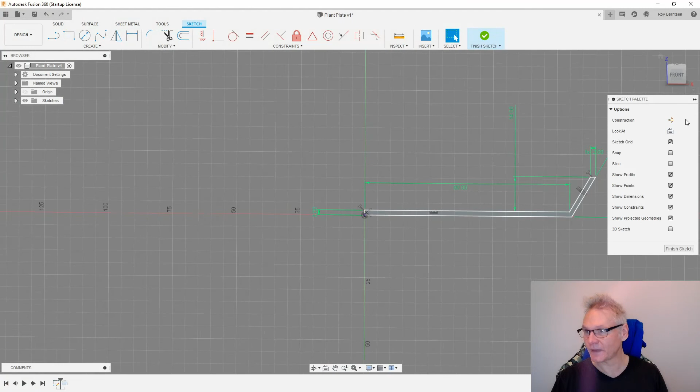I'm Roy and I'm going to show you how I design a new pot for my new houseplant. So I already did the plate which is going to be under the pot, and I'm going to talk about how I designed this. I just make a sketch on the front plane looking like this.

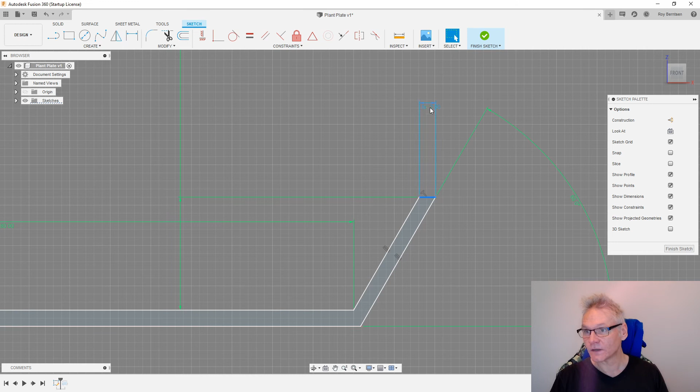I want it to be 2 mm in thickness. What is important to consider is that this line is also adding up in your line count. I have a 0.5 nozzle. I'm going to print with 0.5 mm line width. So I want this number to be able to be divided by 0.5, which means I can have 4 lines going here. And I'm going to show you why this is important.

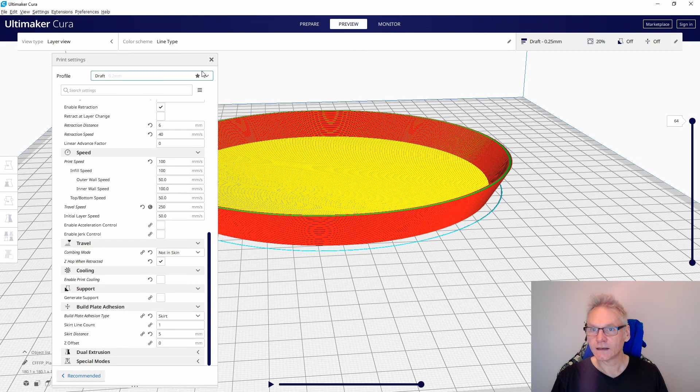I'm just going to revolve this, use revolve in Fusion, pick the profile and do full rotation. Take it into Cura. And now we can see why it is important to have the walls as I talked about. If you now slice it and go to preview, you can have a look at the walls. You can see that the walls fill perfectly with 4 lines. There's no infill, no nothing. You save a lot of time skipping the infill. So this is what we want.

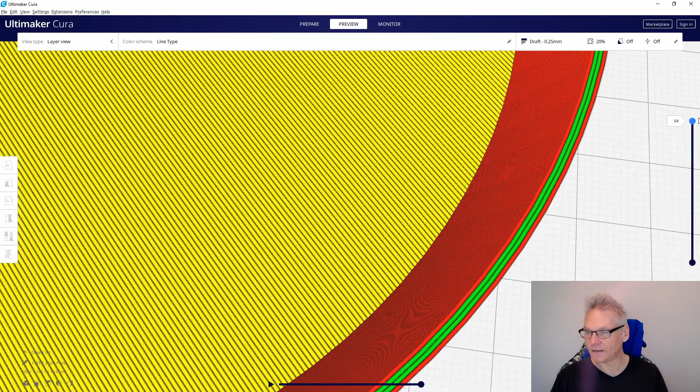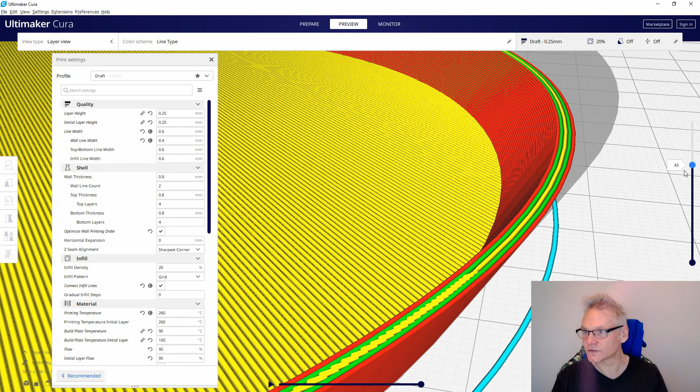Let's say if my nozzle was 0.4 and I was printing 0.4 line width, you will see what I'm talking about. So we're now actually at 2 hours 23 minutes because we need to fill between the wall lines, because our wall lines do not make up for 2 mm thickness. So let me go back to 0.5. Now you can see it's perfect. So this is what we want. And we saved 15 minutes. We're now at 2 hours 7 minutes.

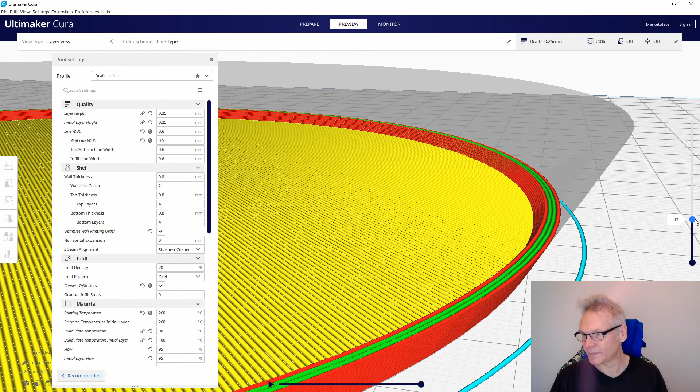And I'm printing also the bottom solid. So it's all solid, no infill here, as I want it to be sort of waterproof. Now I want to make the pot. So I did some measurements on the plant to get the right size pot.

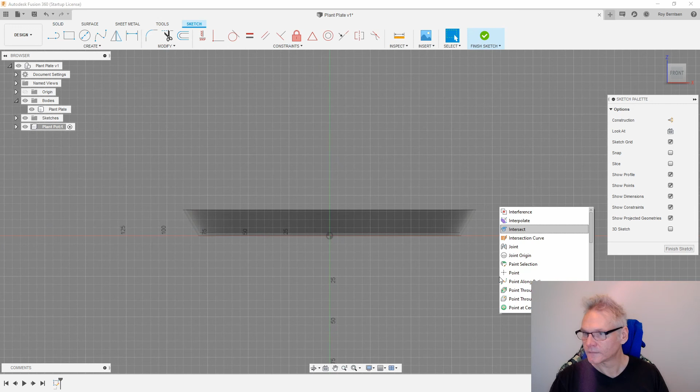I'm going to do the pot also inside this drawing, but I want to do it as a separate component. Add a new component, do a drawing on the front plane. Let's do an intersect. Choose body, pick this guy, check slice, and we can see from the plane we are drawing on. Let's just make a center axis. I did measure the height. Let's do 155. Another line from the origin and out to the side.

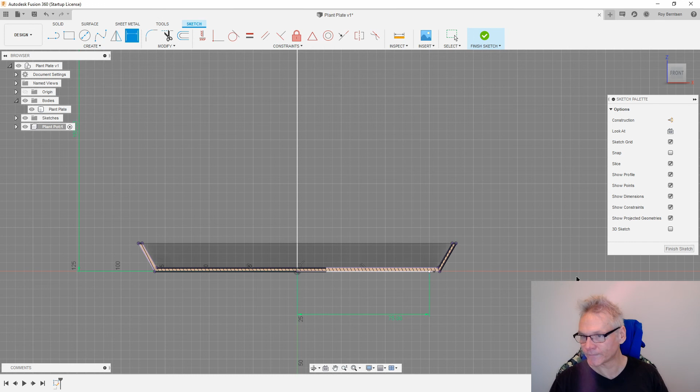So we need the bottom diameter. Dimension this to 75 mm, which gives us a diameter of 150 mm. At the top we need a bigger diameter, so let's do 210, and half of that for the radius. 105 should be fine. Now we can just hide the plant plate. And now I want a nice wall.

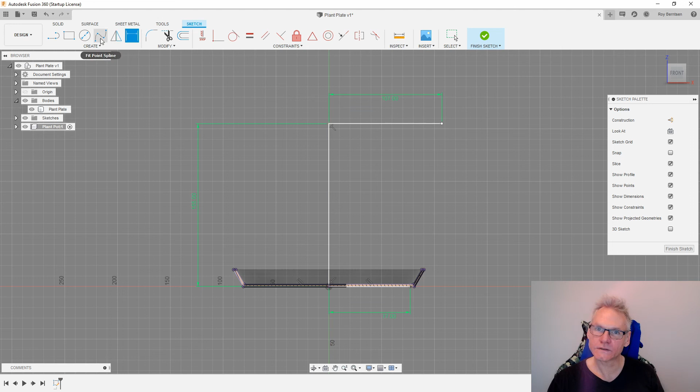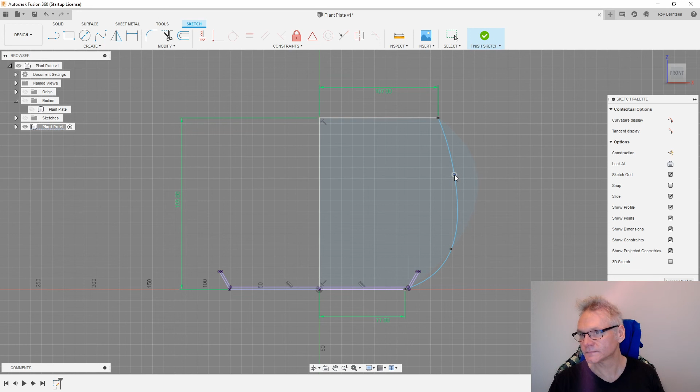And I want to use the spline. So let's just start at the top and pick somewhere out here, and then go to the bottom point and click create. So now we can make a nice profile for our pot. We can just drag these guys around. I'm not sure how we want this to look. Let's just revolve the profile.

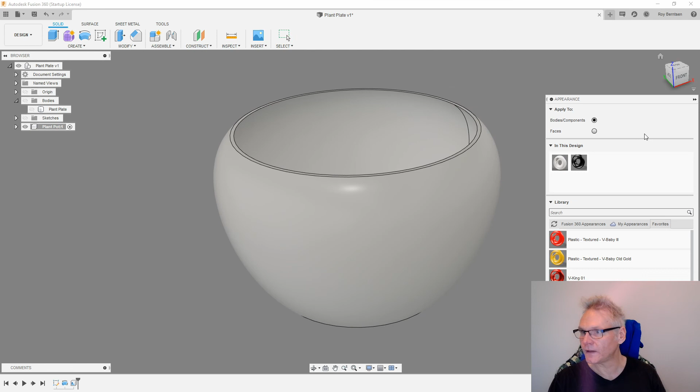You can also shell this now. Go to modify and shell. Do a 2 mm shell like this. We are not going to use this shell because the same as with the plate applies here. We want the walls to be 2 mm vertical, and using the shell, this will not happen. Let's apply another appearance to this.

Let's do something transparent. I don't like this very much, so I'm gonna go into the pot sketch. I'm gonna click the eye so I can see the sketch, and then I want the view from the front, and then I can drag this around and you will see that it updates. So this is much nicer, I think.

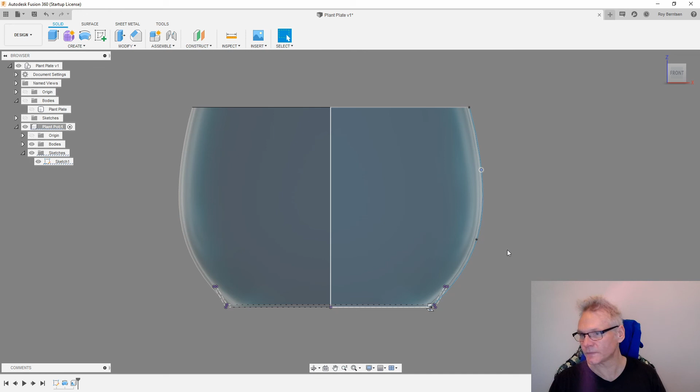To get a vertical 2 mm wall, I need to make another line. For the bottom, there's no problem getting a 2 mm thickness. I'm just gonna add a line here, constrain it to this guy, and then I'm gonna set the dimension from here to here at 2 mm.

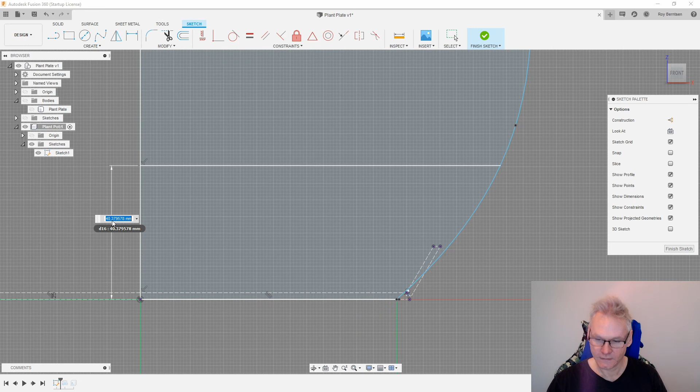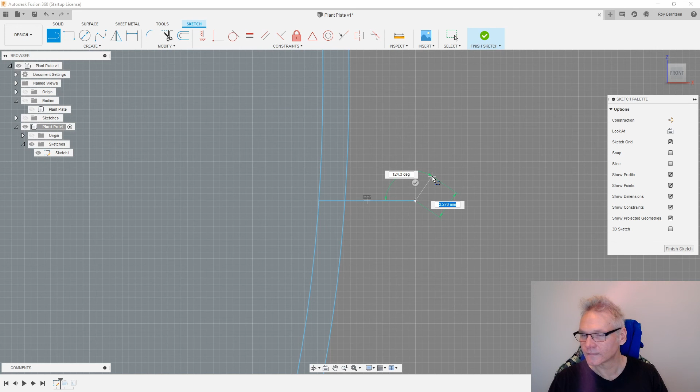What is more difficult is this guy. What we can do is actually use the move command. The move command also lets you make a copy, so create a copy, and we want to move this -2mm inside. Let's now just check if the walls actually are 2mm in the horizontal direction. You can see it is 2mm. So this is what we want for a nice print result.

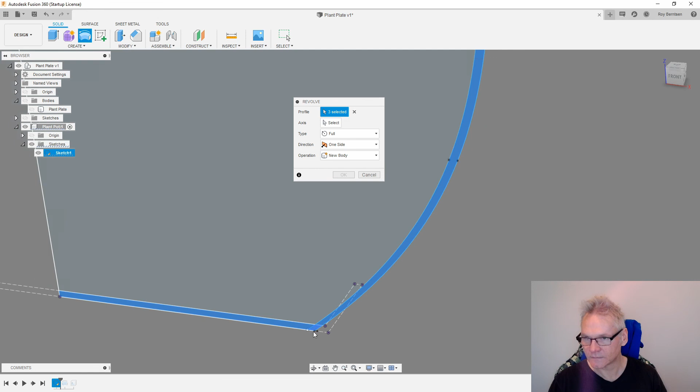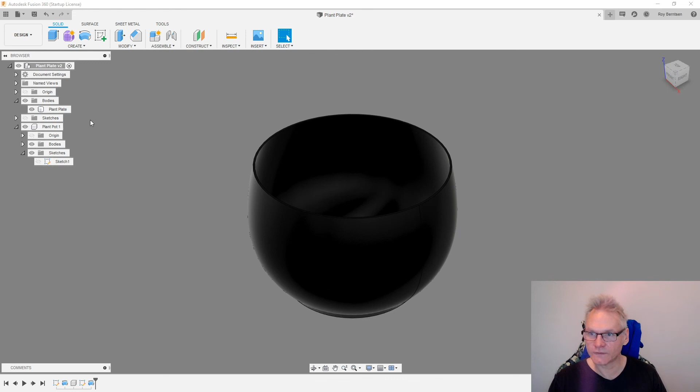So I'm just gonna finish that sketch, revolve, and pick my profiles. Select the axis, the Z-axis, and do a full new body like this. Then I'm gonna hide the sketch again, and let's just apply something else now that we are happy with it. Let's activate the top level, and let's bring out the plate. I want to bring another color to the plate. Let's constrain the pot to the plate.

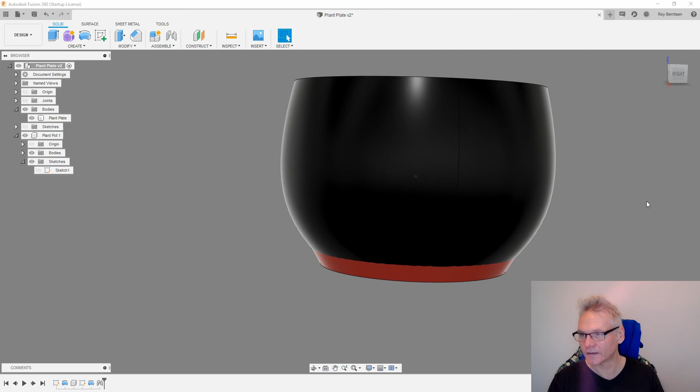So we're just gonna hide the plate, make a joint from the center of the bottom to the center of the plate. We now see that we have some problems with our pot, which interferes with the plate. So let's slice this now. So this is what it looks like. So we may need to make some changes to either the plate or the pot. As the plate is already on the 3D printer, I need to make changes to the actual pot.

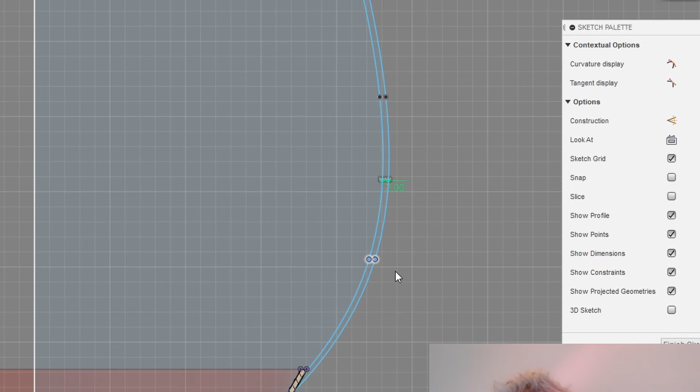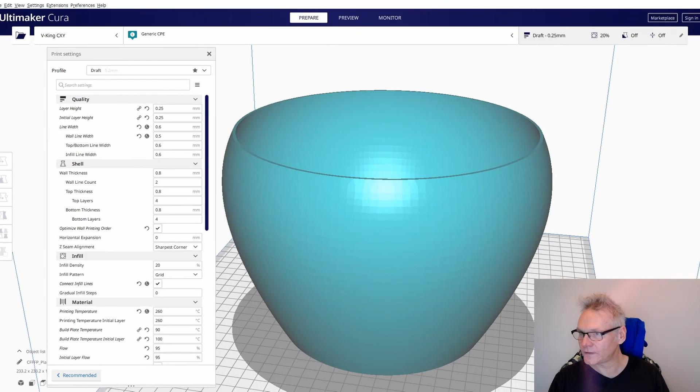Let's grab these 2 points and do something like this. This also looks nice, I think. I'm happy with that. So let's just do a 3D print. Let's bring that into Cura and see. This is how it looks in Cura. So we're talking 8 hours. We are going to decrease that. Let's have a look at the preview and the walls, if the walls are what we want them to be. And as you can see, the walls are perfect.

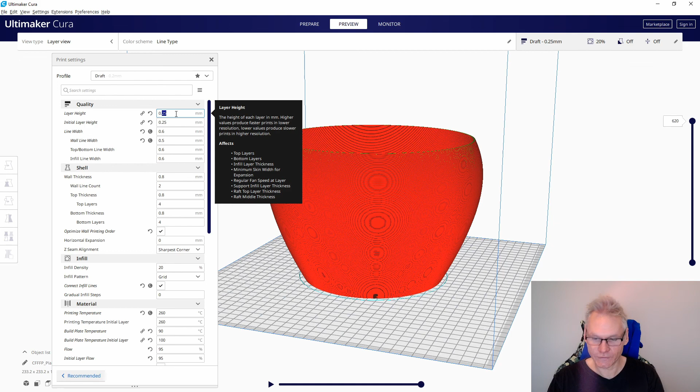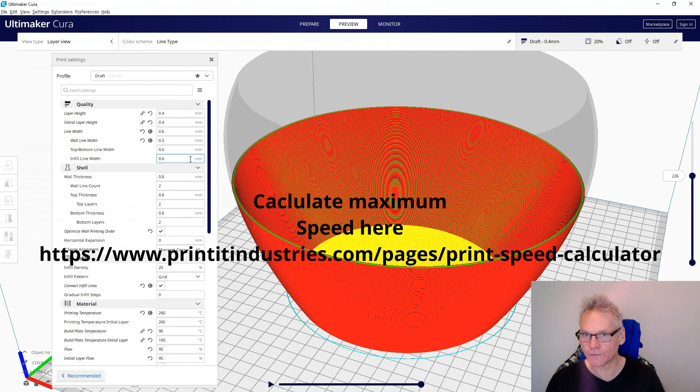If we did use a shell on this, it would not be perfect and the print time would be much longer. I do want to increase the layer height, so let's try 0.3. Save quite a lot of time, 6 hours 45. Let's try 0.4, 5 hours at 0.4. That's almost half what we started with. The speed, however, is set to 100mm a second, which might be a little bit too much for a 0.4 layer height. So I want to try printing it like this.

We are now at 5 hours 9 minutes. Let's try upping the outer wall speed to 60mm a second. So we're now at 4 hours 41 minutes. So that's it. Let's print this now and have a look how it turns out. So this is what it looks like, and I'm happy with that. We used about 250 grams of filament. This is CPE, so it's expensive. It's supposed to be watertight, and the cost would be about 10 euro.

Print time was 4 hours 45 minutes for the pot and about 2 hours for the bottom plate. Here you can see a render of the pot and the plate. I made some holes in it. I'm not sure if that was necessary, because it's easier to print if you don't have the holes, and also it will take a longer time when you have the holes because you have more travel moves. But it looks okay, I think.

Here you can see the plate and the pot and the plant. And here it is assembled, and here it is in its place. Useful 3D printing, useful 3D modeling. I hope you enjoyed this project.